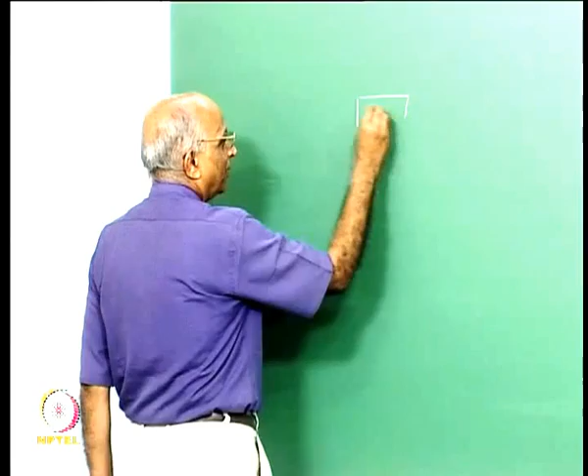When we discussed solid propellant rockets, we told ourselves, well, you have a solid propellant which burns, you have a flame near to the surface, and once a solid propellant rocket begins to burn, it is impossible to extinguish it, right. This is what we told, because you have the grain in a case, and once you ignite the grain, which is the grain over here, there is no way you can quench it, it continues to burn.

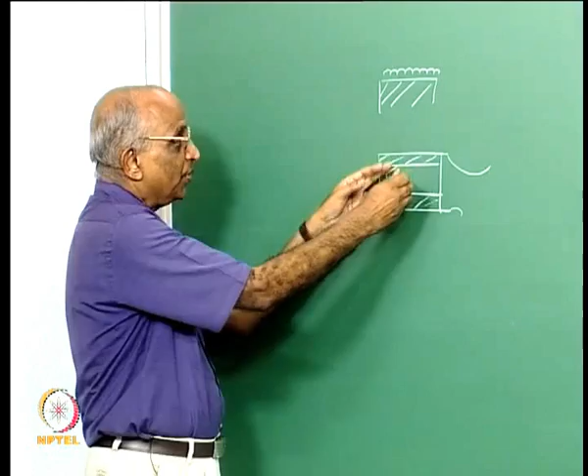Of course, there are some works which are done to see under what conditions you can stop the burning, and by rapid depressurization you can quench it, but these have not reached a stage of application. Therefore, we say a solid propellant rocket, once it gets started, you cannot control it, it burns and burns, that is about it.

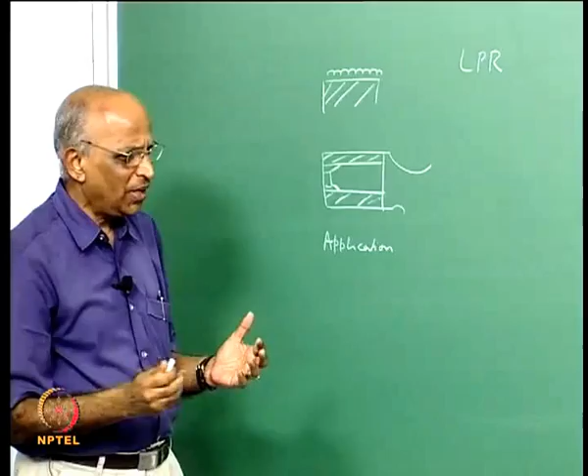Whereas when we talk of a liquid propellant rocket, we have considered different propellants. After all, I inject a propellant into it, I can always control it, and therefore there are certain advantages which a liquid propellant rocket will have.

Let us examine these things, but to get started with liquid propellant rockets, I thought let us go ahead and look at nature. When we considered the theory of rocket propulsion, we talked of a small insect known as the Bombardier Beetle, you will recall. What did we tell ourselves at that time?

This particular insect is smallish, maybe a centimeter to 2 centimeters or so, and it is somewhat heavy, and we find it all the time at all places. It is sort of unwieldy, it cannot fly that rapidly, and therefore it is always attacked by insects, and also it is harmless, it does not bite, we just pick it up on a piece of paper and throw it out, right, whenever it comes.

Some articles have come out on the Bombardier Beetle in the last 10 to 15 years, and one such article came in the Proceedings of the US National Academy of Sciences in 1997, volume 94, pages 1692 to 1697. The beauty of this is we must be familiar with what happens around us.

This Bombardier Beetle is attacked by ants, and what does an ant do? It stings us, right, and why do you feel a sting? It injects some formic acid into our system. Formic acid is a carboxylic acid, and that is why you feel a sting, the same as when a bee stings us, we feel pain because something is injected into us.

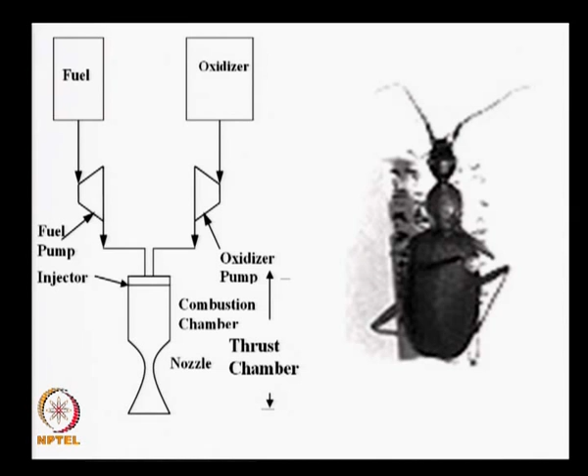A liquid propellant rocket consists just of fuel in a tank and an oxidizer in a tank. You pump the fuel and oxidizer into a chamber at high velocities through an injector, breaking it up into fine droplets and vaporizing it, which all happens in the thrust chamber, and then combustion takes place and you expand through the nozzle. This injector, combustion chamber and nozzle together create thrust and is known as the thrust chamber. So a liquid propellant rocket consisting of all these gadgets is nothing very much different from the Bombardier Beetle in nature. We should learn to look at nature and understand more about it.

I thought at this point we should look at a few more pictures. This is the engine I just showed you, a liquid propellant rocket engine, maybe much taller than this man over here. This is the combustion chamber, this is the pump, this is the nozzle, and this shows the rocket firing.

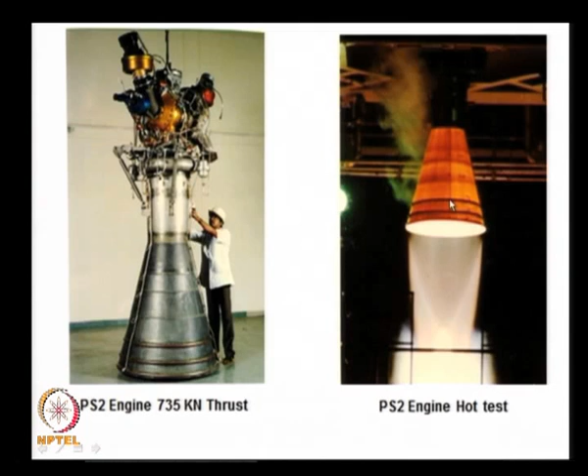I will cover this particular rocket, I was particular to show this. This is known as an RL-10 engine. This was the first cryogenic engine developed, in the United States, in the period of the 1960s.

Here you have the pump mechanism pushing the liquid hydrogen and liquid oxygen into the combustion chamber, which is here, and you see the nozzle is a relatively large portion of the liquid propellant rocket. This gives us some feel for the sizes we are talking of.

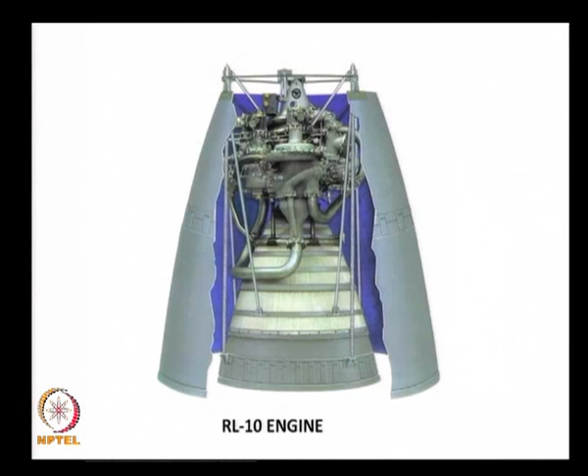What do we infer from these few examples which I have just shown you? In case of a liquid propellant rocket, all what we need is something like a fuel tank, maybe an oxidizer tank, maybe something like a pump.

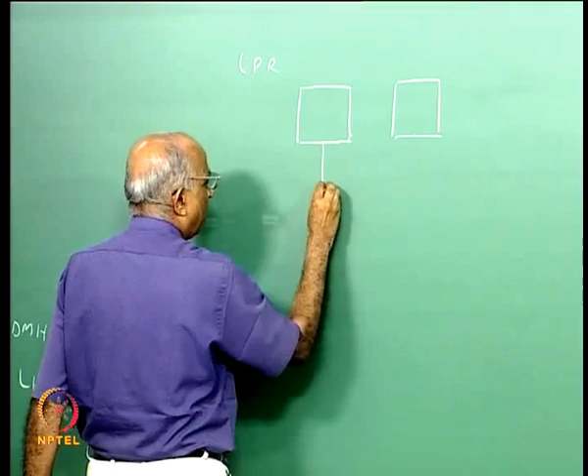From a small value of pressure, I increase the pressure - this shows a high pressure, this shows a low pressure, the magnitude shows the incoming pressure, maybe the incoming pressure should be even smaller, the outgoing pressure should be much larger. I push it into a chamber, and I cannot just push it, I have to break it up into particulates.

That means I need something like an injector which allows the required quantity of propellants to come in, breaks it into droplets, and I have a chamber wherein reaction takes place, and then a huge nozzle wherein I expand the gases. This becomes the liquid propellant rocket.

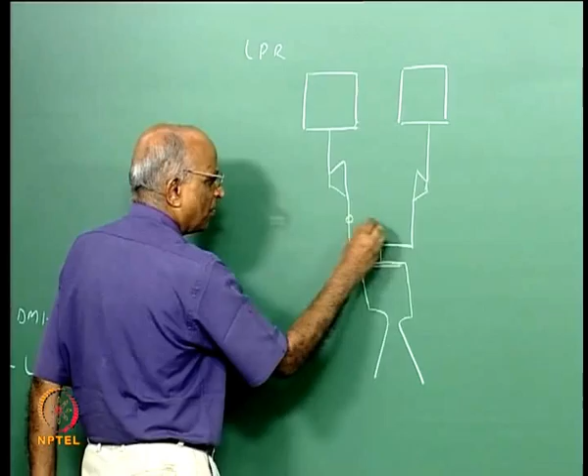Maybe I have to put some valves here to start the combustion and to stop it whenever I want. Let us say the liquid fuel is over here, the oxidizer over here, and here you have the thrust chamber, wherein high pressure gases are formed and thrust begins to build up.

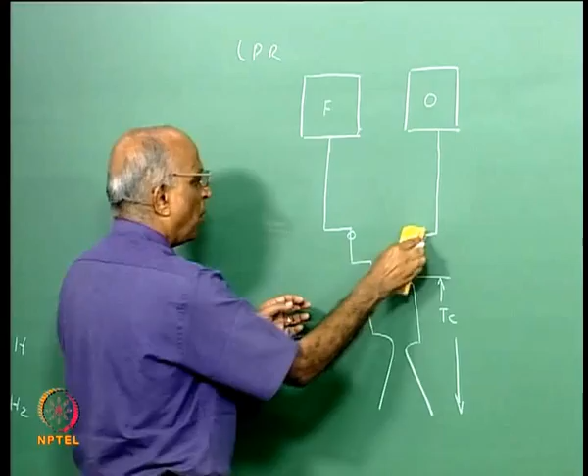Now you will immediately ask me, why do I have to have pumps in the first place? After all I have to supply the fuel - why not remove the pumps and supply it directly, like when we do an experiment using diesel combustion in an IC engine, where I just have an overhead tank, a diesel tank on the wall, connected directly to the IC engine?

Why not directly connect the fuel and oxidizer, and to push it through, maybe have a gas bottle containing high pressure gases, with a pressure regulator over here to reduce the pressure, a reduction mechanism supplying the gases at low pressure. In other words, I put a pressure regulator with a high pressure source of gas.

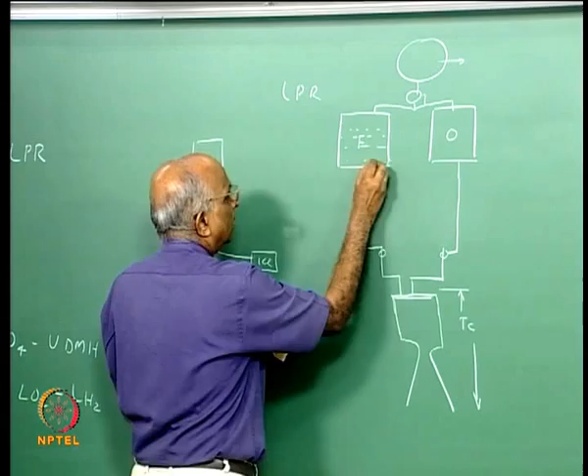Why do I have high pressure? I can have a smaller gas bottle and pressurize the fuel, sending it at high pressure into the chamber. Therefore, I need not always have a pump, but to understand whether pumps are really required, I need to do a little more exercise on this.

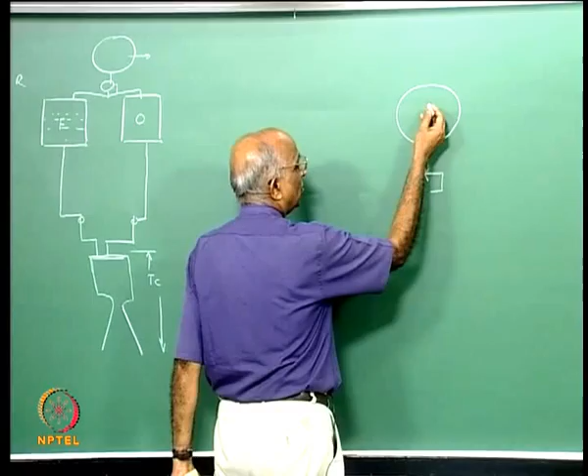Let us see what is required. Let me again replot this. I tell myself I have something like a gas bottle which stores gas at high pressure, and a pressure regulator downstream. What does the pressure regulator do? From high pressure, I can store gas at maybe 30 MPa, 300 to 400 bars, but I do not want such high pressure - I want much lower pressure, maybe 10 MPa or 1 MPa.

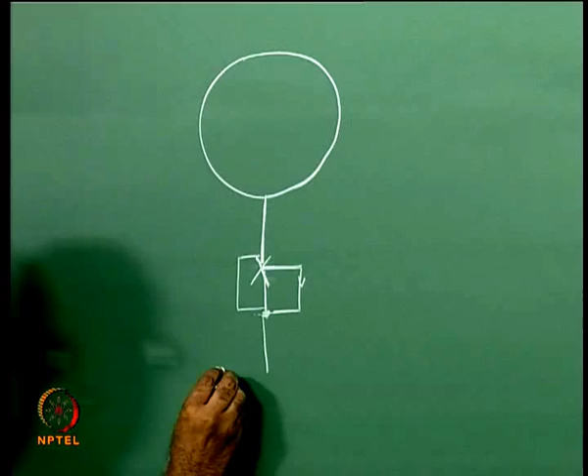I put a pressure regulator which senses and reduces the pressure through a particular opening - it is a feedback control, connected over here as it controls. Then I connect this gas to the fuel tank and the oxidizer tank, which are full of propellants, and bring it into the combustion chamber over here.

What am I talking about? I'm talking about having a high pressure gas bottle. I regulate the pressure to a lower value and push the fuel and oxidizer into the combustion chamber. This becomes something like using a cold gas, a high pressure gas.

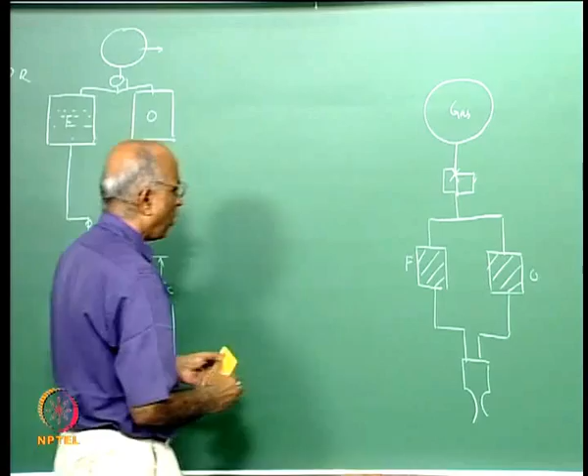I call this a regulated gas pressure fed system. I started with a pump. Let us see under what conditions I would really require a pump, and under what conditions I can use a regulated pressure system instead.

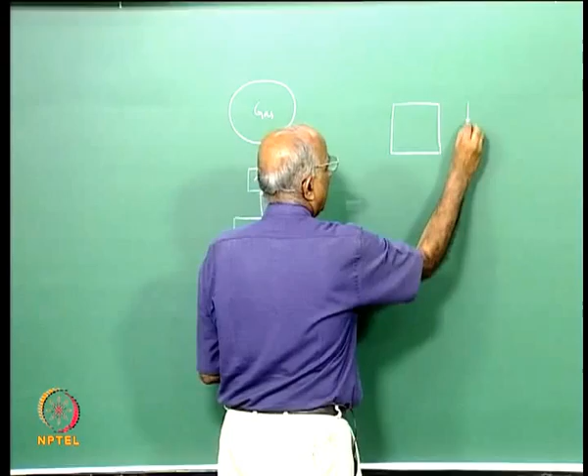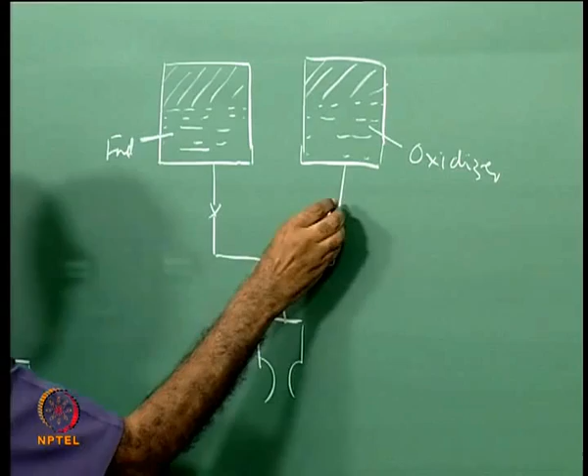I fill gas, maybe at high pressure, and put a valve. When I open this valve, propellant flows immediately. When I want to stop it, I close this valve. The gas is contained in the tank itself and it blows the propellant into the chamber. This is known as a blow down system.

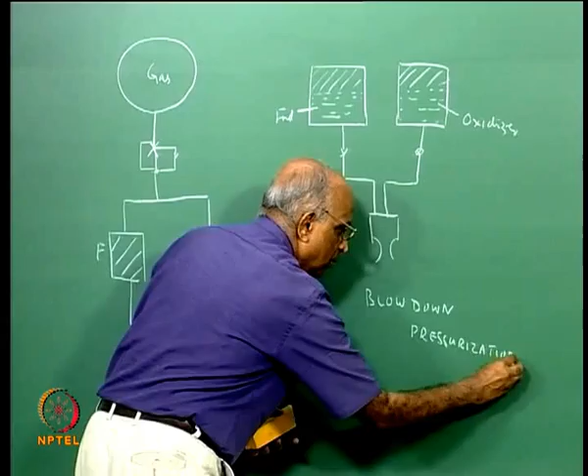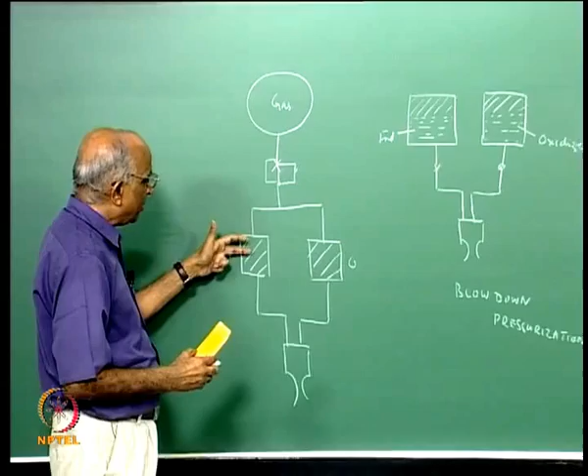So what have I been talking of? In liquid propellant rockets, we need to supply the propellants. We looked at options: a pump may be required, but also a cold gas at high pressure is possible. This gas can be directly filled, and as it blows down, the pressure keeps decreasing and therefore the thrust keeps decreasing. Whereas if I give a regulated gas, I maintain constant pressure and therefore get constant thrust.

Therefore, the high pressure gas fed system could either be in a blow down mode or in a regulated mode. But we can't rule out that the pump is not required.

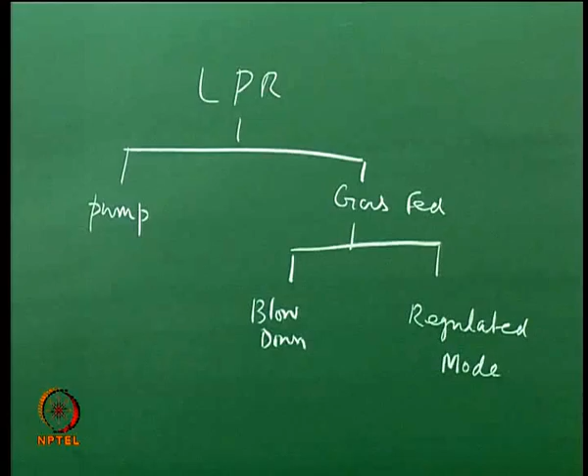For instance, if you have a satellite sitting in space, let us say a spacecraft, I will show you a small model I have of this satellite. Let us say the satellite, like INSAT, is something like a box structure with solar sails. When light falls on the solar sails, it creates pressure. We will study this method of propulsion towards the end of our classes.

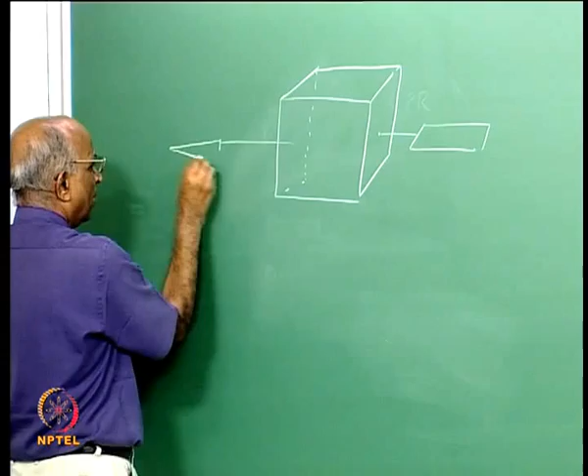You have to balance the pressure from the sunlight falling on this, so you put something like a balance such that it does not get tilted. To control the attitude, we put small rockets on the different faces. How do you supply propellant to this?

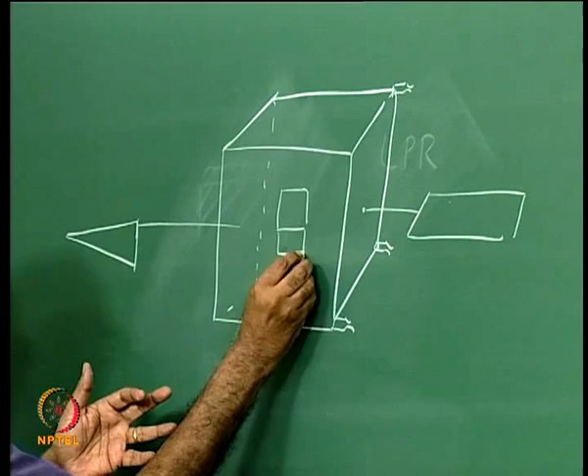Inside the structure, I put a propellant tank, an oxidizer tank. At the bottom of this oxidizer tank, I have a fuel tank, maybe with a common bulkhead, so there's a single connection. This could be fuel, this could be oxidizer. I put gas pressure over here, connected through lines to this rocket, and this rocket, and so on. Whenever I want this rocket, I open the valve and it fires.

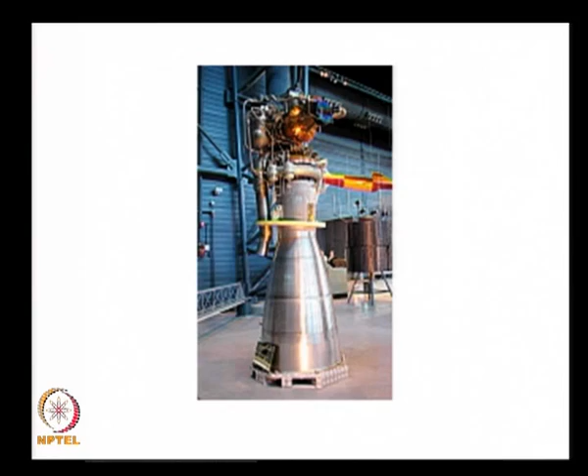But there is a problem.

Whenever I have fuel and oxidizer and a spacecraft is sort of revolving around at a constant velocity, we told ourselves, well, in this frame of reference it has a centrifugal force which is balanced by the gravity. Therefore, there is no weight for this and it creates new problems. Therefore, we have to see under weightlessness how we supply the propellant. Maybe we will take this up after some time.

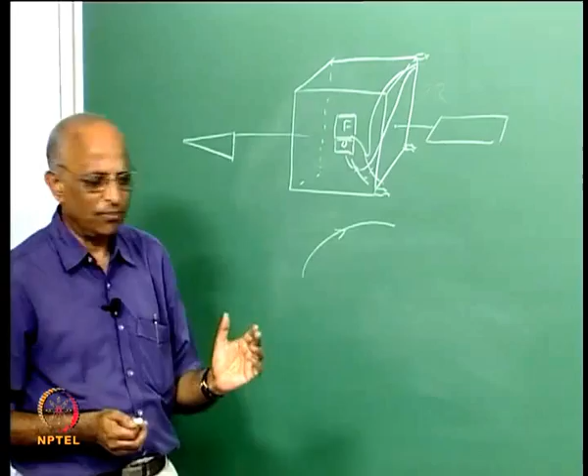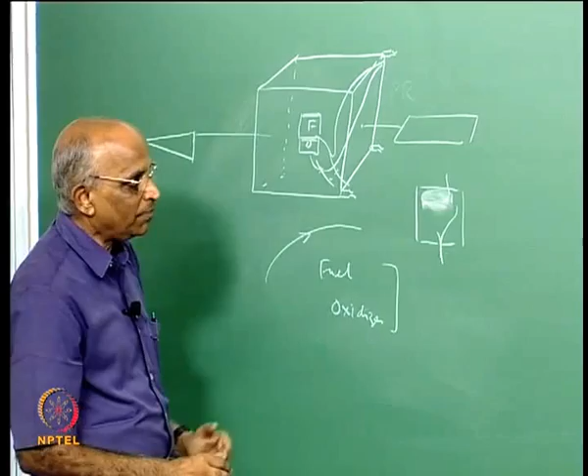This also requires that you supply fuel and oxidizer when they are in a state of weightlessness. That means if I put a propellant in a tank, the propellant may sit on top, it may not really come to the bottom, and when I pressurize it, the gas may come out and the liquid may not come out. So supplying propellants in a state of weightlessness is again going to be a problem. Maybe we will take a look at it.

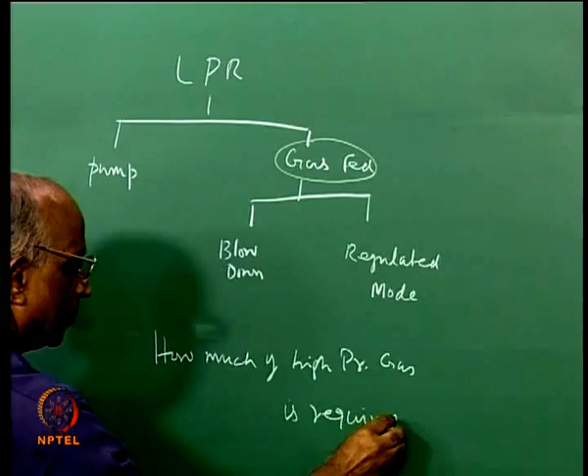But right now let us take a look at what constitutes a gas fed system, which could either be blow down mode or regulated mode, and then let us come back to the pump. Let us see if in between these two anything else is also there. To be able to do this, let us first try to find out how much high pressure gas is required. First thing, we have to supply the propellants. Once I give the thrust, I know what must be the mass flow rate of propellants. How do I calculate it? Let us refresh ourselves again.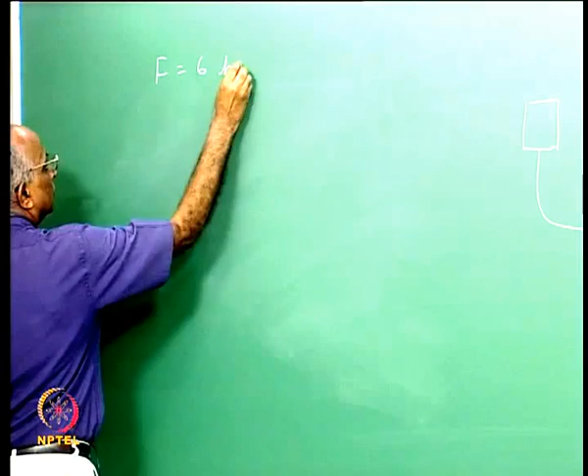Suppose the thrust of the rocket, as an example, is 6 kilonewton. Let us say the specific impulse of the rocket is equal to 3000 Newton second per kg. Then the mass flow rate of total propellants, fuel and oxidizer, is equal to 6000 Newton divided by 3000, which is 2 kg per second. To supply this 2 kg per second, maybe the rocket has to fire for a small time, let us say 200 seconds.

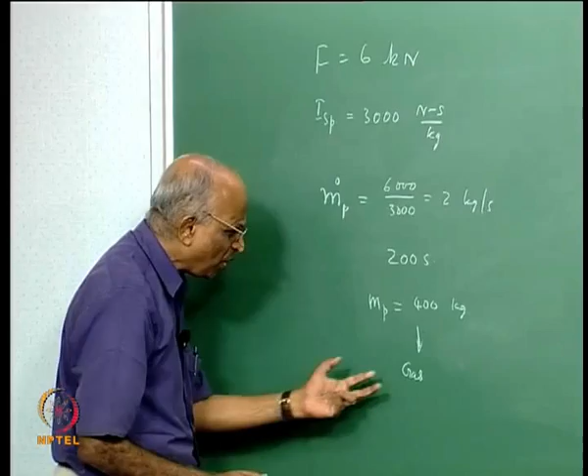Then I need to supply a total mass of something like 400 kg during the 200 seconds. We talk of 6 kilonewton, 6000 Newton, this is 3000 Newton second per kg, 2 kg per second. This is the total mass of propellant which has to be exhausted. I want to know how much mass of gas is required. Do I require 1 kg, do I require 100 kg? Because if the gas requirement is large, the rocket cannot take off. Let us try to estimate it. And how do we estimate it?

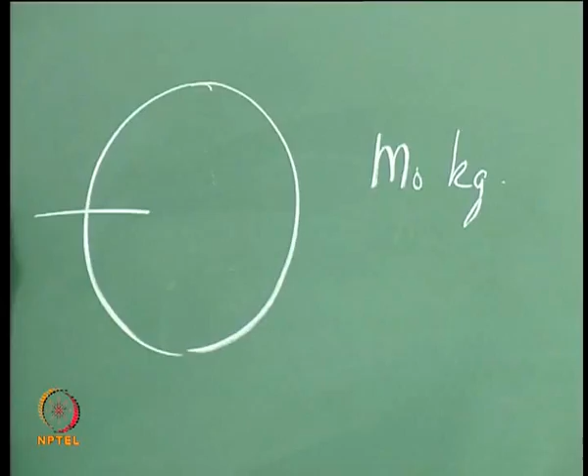We again follow the same figure, but now let us simplify it. I have gas pressure, and we also told ourselves that gas can be stored at fairly high pressures. Let us plot it out. I have a gas bottle containing, let us say, M0 kilograms of air or whatever gas is required. I must also find out which gas will do my job well. Let us say it is at a high pressure P0 and at the room temperature T0, because at this point I do not want to say I need a hot gas or a cold gas. Maybe when I derive the expression, it will be clear what type of gas is required and what must be the temperature of the gas.

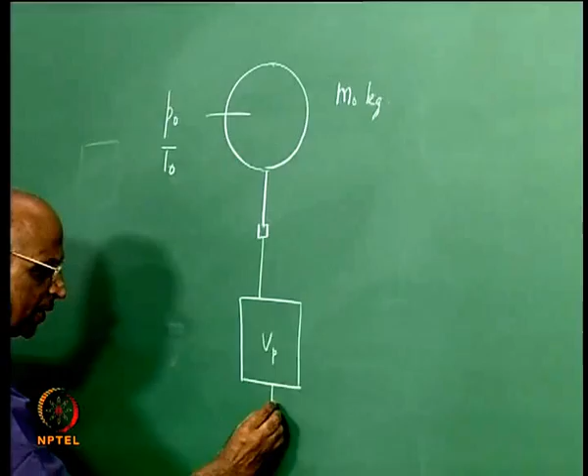From this high pressure source, I put a pressure regulator here and reduce the pressure from the value of P0, and it must communicate with the two tanks I put together. Let us say the total volume of propellant is Vp, and this is what must be supplied to the thrust chamber over here. Let us say the pressure at which I would like to supply it, at this surface, is Pp, in Newton per meter square or Pascal, and I reduce the pressure from P0 to Pp in this regulator.

I reduce the pressure from P0 to the value Pp. Now my point is, how do I find out the value of M0 kg? I think it is a straightforward thermodynamic problem, but before doing this problem, it is also required for us to put some other things down. Let us do a general problem.

Let us say at this point in time, when I start the work, the quantity of propellant liquid which is available is Vp. When I finish my exercise, I use some gas for pressurization. Therefore, at the end of operation, let us say Mr kg is left, the temperature here is Tr, the pressure is Pr, and I have the same tank over here, all the propellants are expelled, it is now gas over here.

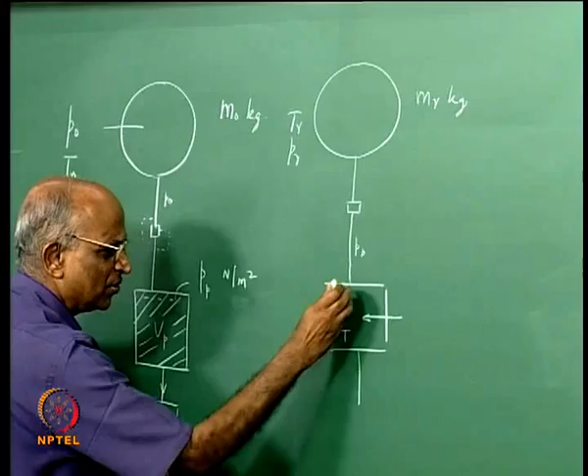Since I have reduced the pressure to Pp through the regulator, when the propellant has just got out of it, it will be filled with gas at a pressure Pp, and the temperature, whether it is slow or fast depletion, reaches the temperature of the propellant, Tp. This is my initial condition, let me make the figure complete.

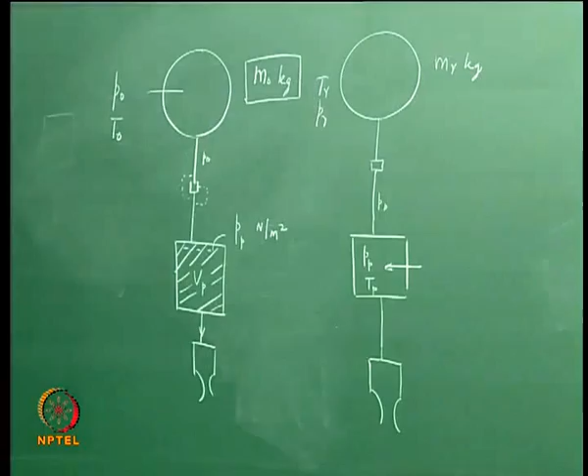What is it I am telling? I have pushed out a volume of propellant Vp, and the gas has expanded and occupied this volume in addition to this volume, and this is my final condition. I want to write an equation and determine the value of m0 kg required. Maybe we have done such problems in our thermodynamic subjects earlier.

What is happening? Let us make an assumption that the tanks are fairly insulated, the gas bottle is insulated, there is no heat transfer taking place, and therefore I ask myself, what is the work done by the gas in pushing out a volume Vp of the propellants?

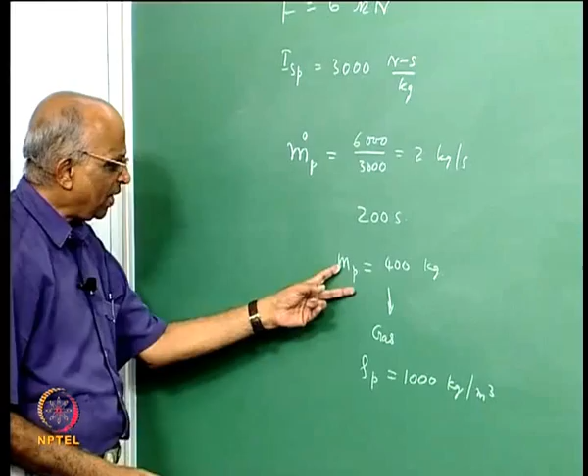Let us calculate Vp for this particular problem. If I take the density of the propellant to be the same as water, 1000 kg per meter cube, 1 gram per cc, the volume Vp is 400 divided by 1000 meter cube, which is equal to 0.4 meter cube. For this rocket I have to get rid of 0.4 meter cube at a given value of pressure. Before I complete that problem, let us generate an expression.

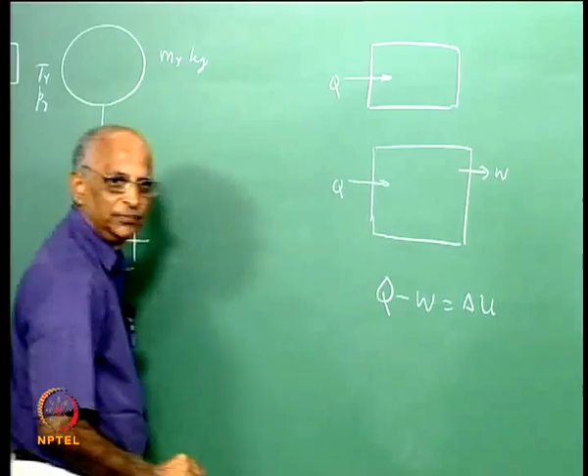Supposing I have a system like this. This is my initial state of the gas, and the final state is this, in which the gas has moved over here. The system does some work at the boundaries, so I can write Q minus W is equal to the change in internal energy for a system. I take an adiabatic system, Q is 0, so I need to find the value of W and the change in internal energy. Let us write the expressions for these two.

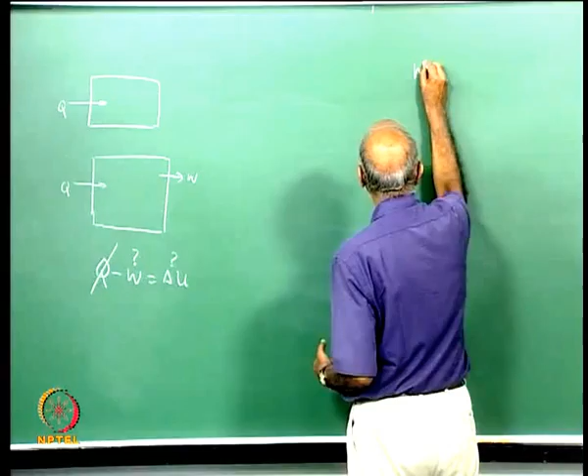The work done by the gas is in expelling the liquids. I have a constant pressure applied, the displacement is Vp, so the work done is equal to Pp into the volume of the liquid. What is the change in internal energy, final minus initial? Finally, I am left with Mr of the gas over here. We know du by dT is equal to Cv, where U is the specific internal energy,

and dH by dT is equal to Cp. Since U is equal to Cv T, the final internal energy is the final gas Mr into Cv into Tr, at a reduced pressure and temperature because it has expanded, plus the gas Mp into Cv into Tp. I say the volume of the plumb lines is much smaller, therefore I neglect it. And what is the value of the initial internal energy? Minus, yes, you could tell me.

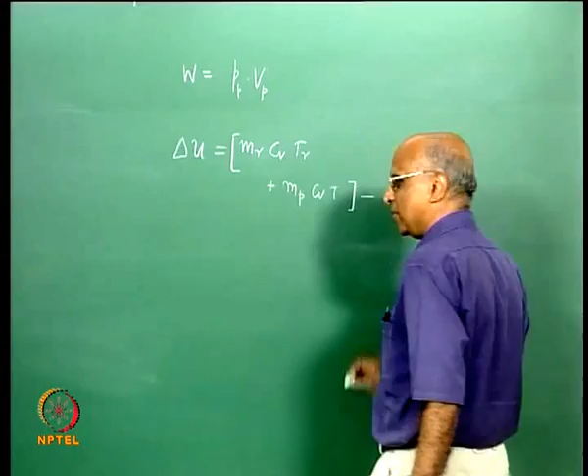What will be the initial value? Yes, m0 into Cv into initial temperature. I need to solve this equation and find out this after knowing that minus W is equal to delta U. Let us find that value. Maybe I use this part of the board.

What I have: Mr into Cv into Tr plus Mp into Cv into Tp, temperature of the final propellants should have been Tp over here, minus M0 Cv into T0 is equal to minus W minus Pp into Vp over here. Is it all right? Q minus W is equal to the change in internal energy.

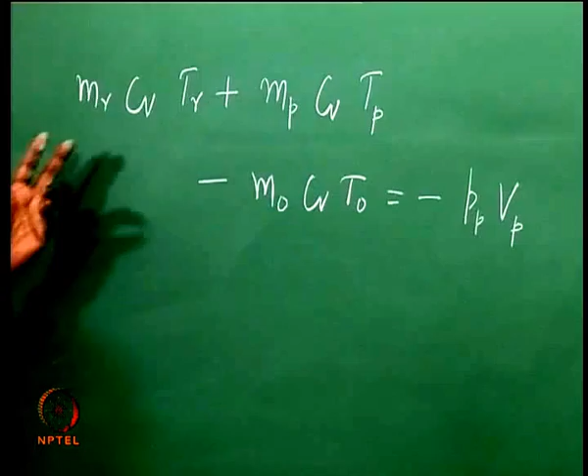I want to solve this. To be able to solve this, let us see what Cv is. We know Cp minus Cv is equal to R, and therefore Cv into gamma minus 1 is equal to R, or rather we have Cv is equal to specific gas constant divided by gamma minus 1, where R is the specific gas constant, has units of joule per kilogram Kelvin. And Cv therefore has units of again joule per kilogram Kelvin.

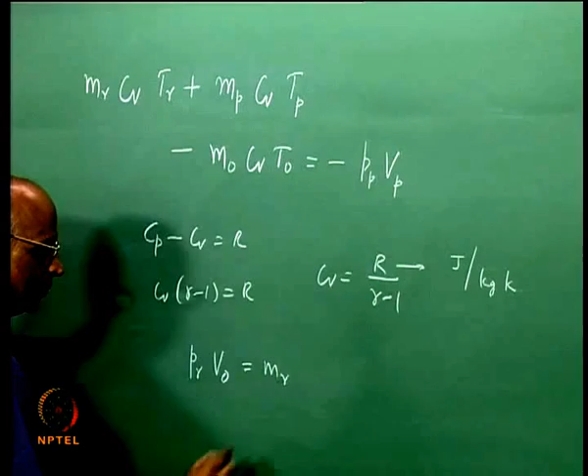Now, what is the value of Mr from the gas equation? We have Pr into V0, that is the volume of the tank, is equal to Mr into R into Tr, or rather I can write the value of the final mass after expansion has taken place in the tank, and the mass of gas in the tank is equal to Pr into V0 divided by RTr.

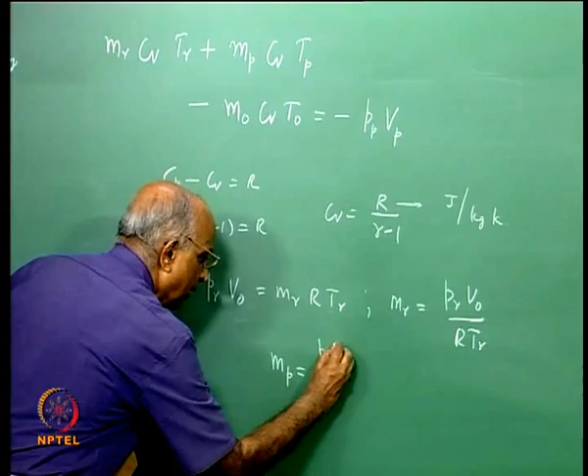Is it all right? Similarly, I can write an expression for Mp, and what will Mp come out to be? Mp should be equal to Pp into Vp divided by R into Tp over here. I need to find the value of M0, therefore let us not touch this. Therefore, let us substitute these two values of Mr, Mp and the value of Cv in this expression and try to get the value of M0 coming out.

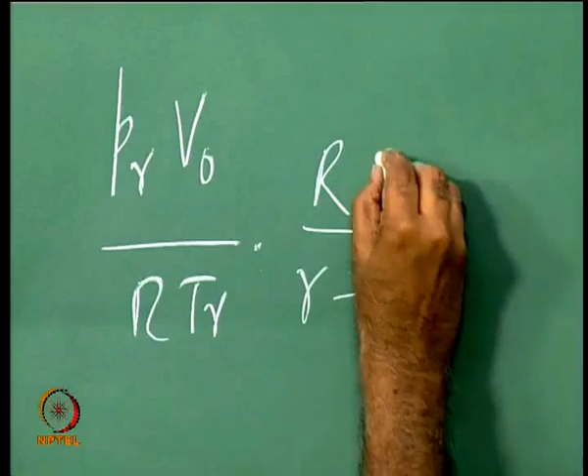Let us say Mr is equal to Pr into V0 divided by RTr, and Cv was equal to R divided by gamma minus 1, and into Tr, plus similarly I get Pp Vp by RTp into R, again I get the value of Tp divided by gamma minus 1, minus I get the value of M0 into R divided by gamma minus 1 into the value of T0 over here, this is equal to minus Pp into Vp over here.

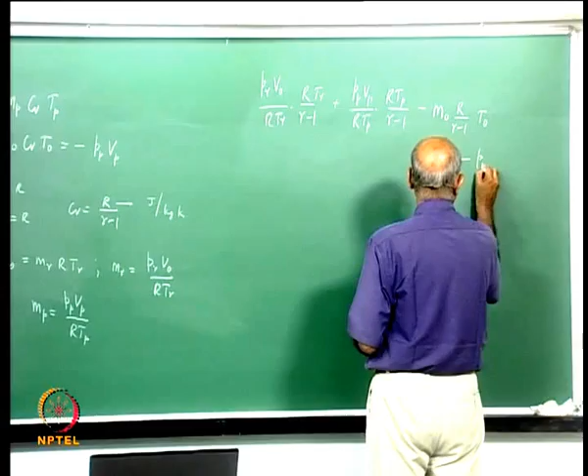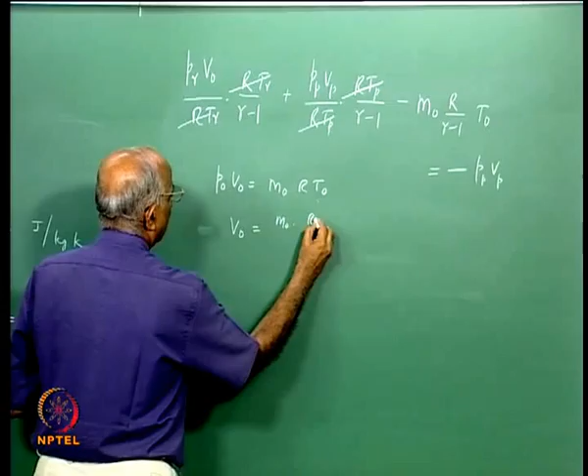Is it all right? Now, I find that RTr cancels, RTp cancels, and now if I were to simplify, I do not know the value of volume because volume is related to mass. I can write P0 V0, that is the initial condition of gas before starting, is equal to M0 RT0, or rather I can write the value of V0 as equal to M0 into RT0 by P0.

I substitute this expression, volume is equal to mass into RT divided by P, over here, take gamma minus 1 on the right hand side, because all the 3 have gamma minus 1, and therefore I get m0 into RT0 into Pr by P0, plus I have Pp into Vp, minus m0 into RT0, is equal to minus Pp, I am sorry, because I am going to remove gamma minus 1 here, minus Pp Vp into gamma minus 1.

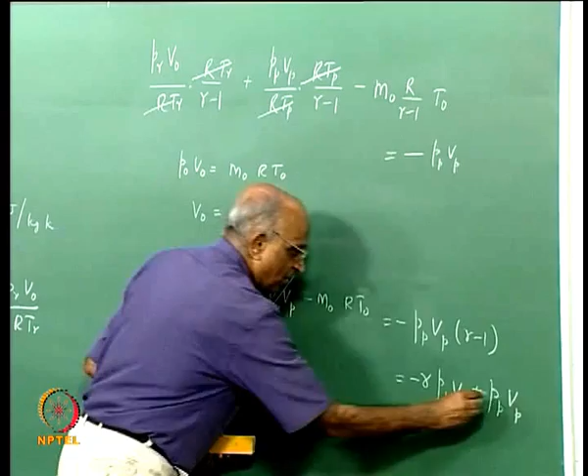This right hand side now reduces to minus gamma Pp Vp plus Pp Vp, because minus and minus becomes plus. Therefore, immediately this and this gets struck off, and now we are able to get an expression for m0. Let us put it over here. Let us collect the similar terms. I get RT0, which will come at the denominator. I have in the numerator the value gamma on the right hand side. Therefore, gamma Pp Vp divided by 1 minus the value of Pr by P0.

Please check this. How did we come to this? We have m0 RT0 into Pr by P0 minus 1 is equal to minus gamma Pp Vp. Therefore, I change the sign on both sides. I get gamma Pp Vp divided by RT0, which comes in the denominator, divided by 1 minus Pr by P0. Therefore, this becomes my mass of the gas which is required.

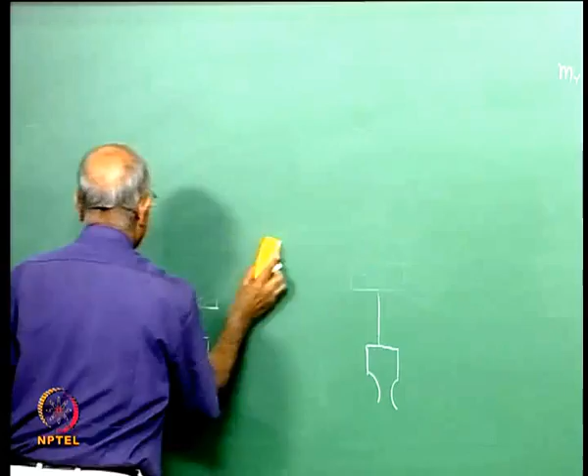Now, I want to examine how much is this gas, what is this expression. Whenever we derive an expression, we must take a look and see under what conditions this holds good. Let's do that. I do not need this anymore. I say, had the process been isothermal, what would be the gas I require? M0 will be equal to Pp Vp by RT0, because it is isothermal.

Therefore, what happens when gas is expanding, and that also irreversibly? Under isothermal expansion, I would just have Pp Vp by RT0, and due to the expansion process, I have an amplification taking place, 1 minus Pr by P0, and this is because of the expansion process which is taking place. I am writing the same thing, Pp Vp by RT0, because M is equal to PV by RT0, isothermal, and then this is the multiplication factor.

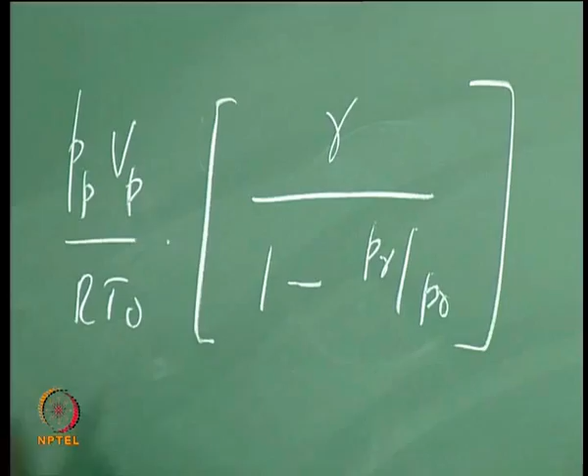Now, I want to find out, maybe for this engine which we said is 6 kilonewton, the mass of the gas which is required. Let us do one example, and then we can extend it for different pressures and different thrust. Let us say in this case the volume is equal to 0.4 meter cube, and now how much gas do I require? Will this expression also tell me what is the type of gas which I require? Do I require a light gas or a heavy gas? What does this expression tell me? Can we all infer something from this?

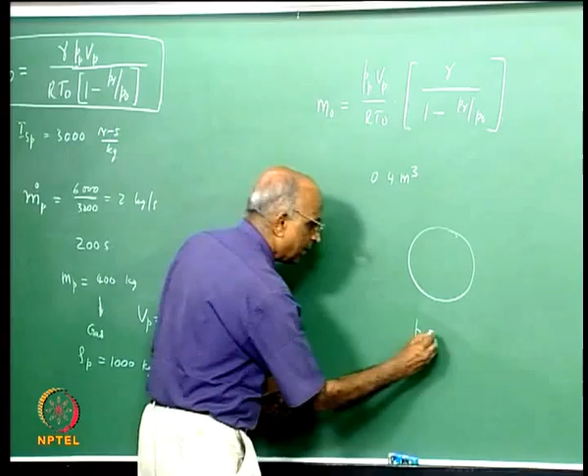Should I pressurize the initial volume with a high molecular mass gas, low molecular mass gas, or at a high temperature, or under what conditions? All what I can tell you is the value of P0 is limited, because I need a gas bottle which can hold certain pressure, and that pressure cannot be greater than around 300 to 400 bar, because beyond that to make something hold such high pressure gas is difficult. Therefore, normally the P0 is around 30 to 40 MPa. This is bar over here, right. Now, all that I know is P0. How can I choose the other parameters like gamma, R and all that? Does it tell me what is the type of gas which is required?

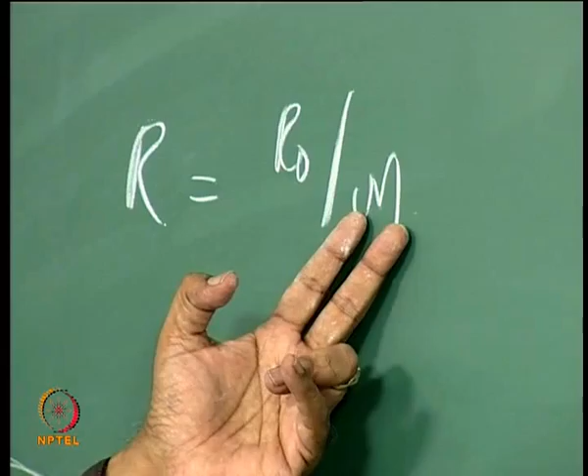We do one more exercise. Let us say R is equal to universal gas constant divided by the molecular mass, 8.314 by the molecular mass. If the molecular mass of the gas is smaller, I get a very large value of R. If I get a large value of R, I can have a smaller mass of the gas. Therefore, this immediately tells me the lighter the gas the better. Hydrogen is the lightest, whereas helium has a molecular mass of 4 gram per mole. Therefore, invariably I would like to choose helium, which is a light gas, for my purpose. See, the expression is able to tell us what we are looking for.

This is one. Second is, well, helium has a large value of gamma, 1.67 compared to air of 1.4, whereas R could be something like 4 and 28, 7 times. Therefore, this is not that important, this is more important, and therefore I choose a light gas for pressurization. But this expression also tells me a higher temperature is suited, because higher temperature means I have a smaller mass of the gas. Therefore, rather than a cold gas for pressurization, why not use a hot gas? Why not have some reactions taking place in the combustion chamber and do this? And therefore, this is also an option.

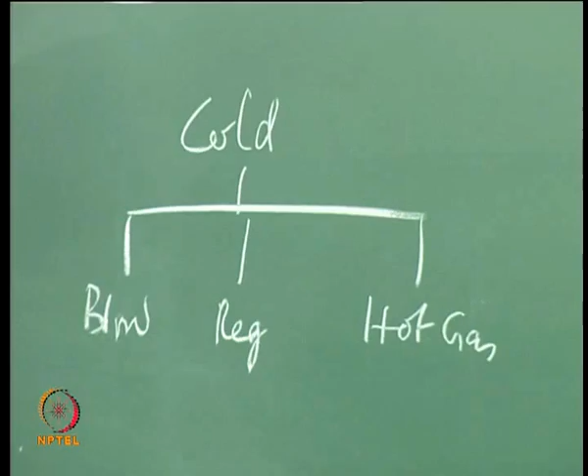Therefore, in addition to saying for cold gas I could have blow down mode or regulated mode, it is also possible for me to have hot gas, and hot gas is more efficient. But in practice it has been difficult. Several countries have tried it, but it has not yet found an application. But I think we should keep this in mind. I think in future this will be a strong contender for a gas pressurized system.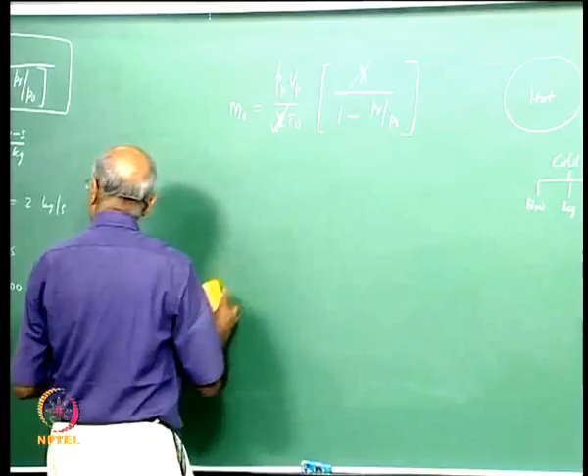Having said that, let us do a small numerical problem to see what is the amount of gas. We should have some feel whether I need 1 kilogram or a few grams. Let us say for this rocket, which is requiring a Vp of 0.4 meter cube, the chamber pressure, a small chamber pressure, is 1 megapascal. If the chamber pressure is 1 megapascal, I have to force propellant into it, let us say Pp is equal to 1.2 MPa.

Therefore, I say yes, the final pressure, the lowest PR, is equal to the supply pressure over here. The volume is known, R for the gas helium is equal to 8.314 divided by 0.004, so much joules per kilogram Kelvin. This is known, and I can calculate the value of mass. And this value of mass for this particular thrust, when the supply pressure is 1.2 MPa, works out to be something like 1.34 kg.

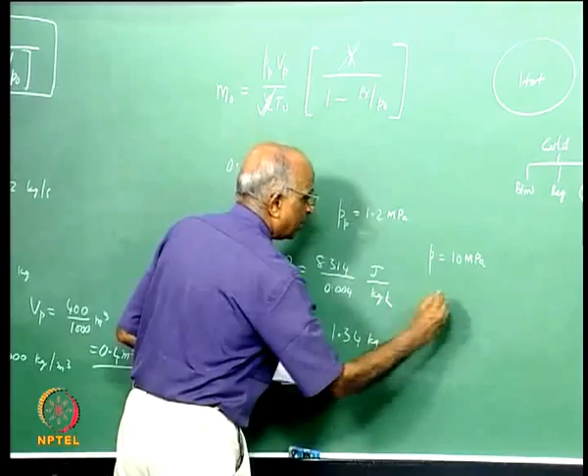Now, I want to slightly change it. I have the same rocket which is developing 6 kilonewton, but the chamber pressure, instead of being 10 bar or 1 megapascal, is now changed to 10 MPa, and the supply pressure therefore becomes, let us say, 12 MPa, and therefore the quantity of gas becomes directly 10 times, that is something like 13.4 kg, right.

Now, if I talk in terms of a thrust which is much larger, maybe 600 kilonewton, the quantity of gas will be very much larger. Maybe you should try this as an example, but let me summarize it through slides. And what I do in the next series of slides is, well, this is what we said as a regulated pressure system. This is something like a blow down system, and we wanted to find the gas.

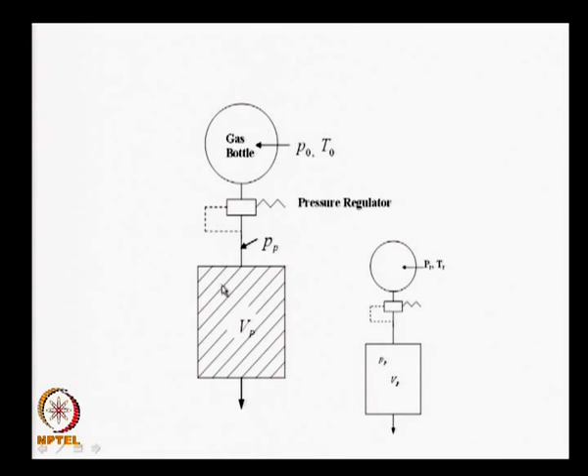Well, we had the gas bottle, we had the regulator, oxidizer and fuel to supply over here, and we simplified it. This is the initial condition, this is the final condition, and then we said m0, mass of the gas required, is equal to Pp Vp by RT0 gamma by 1 minus PR by P0, and then we found out that hot gas pressurization is an option, and now we calculate the value.

When I have a low pressure engine of thrust of 6 kilonewton, the chamber pressure is 1 MPa, the supply pressure is 1.2, the mass of gas required is 1.34 kg. When the same 6 kilonewton is operated at a high pressure of 10 MPa, the supply pressure is 12 MPa, the mass of gas becomes, instead of 13.4, maybe this factor I had removed, therefore it is not 13.4, but it is 21.34. Maybe you all should check it at home.

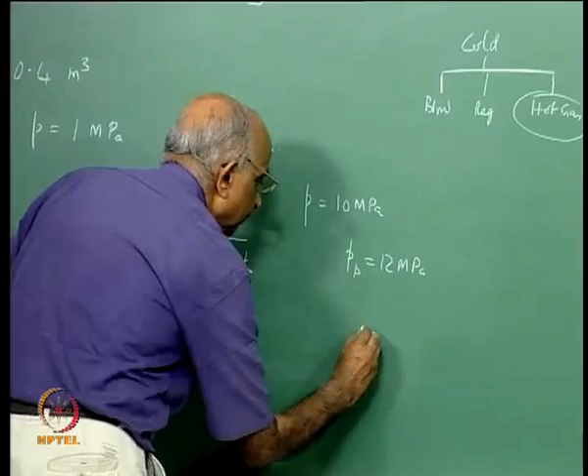You see, when the chamber pressure increases by 10, the quantity of gas is increased by almost 20 times, whereas if I have a high thrust engine of 600 kilonewton, at the same pressure value the quantity of gas required is something like 2000 kg, and therefore it is not humanly possible to have such amounts of gas carried in a rocket, and that is where it becomes necessary for us to have something like a pump which can supply the propellants to it, and that is why the necessity of a pump.

Now if you were to go back and compare the different systems we had, we talked of a blow down, a stored gas, a hot gas. We find when the thrust is small and the burning time is small, I can manage to have a blow down system like what was used in our INSAT spacecraft, because I need very small thrust, I operate at low chamber pressure. When I want to operate at slightly larger time, slightly larger thrust, maybe a regulated gas system is required, or still better a hot gas system, but beyond some thrust and some burning time, I need to operate in this region, which can only be done using a turbo pump or a pump system.

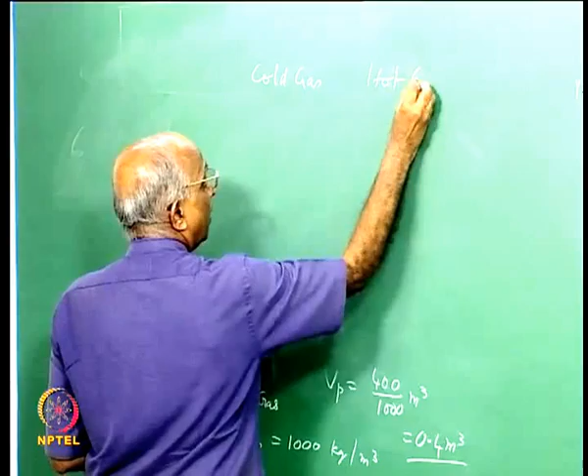Therefore, what is it we have been telling ourselves so far? We said the feed system could consist of different possibilities: we could have cold gas pressurization, that means a gas bottle, or something like a hot gas. The cold gas could be either in a blow down mode or in a regulated mode, but if the rocket fires for a longer time and if the thrust or the chamber pressure is large, I essentially need a pump to take the fuel from the tank into the chamber, and this is what we must remember.

Therefore, maybe I need a pump system. Now let us go back and calculate what is the power of the pump which we require in this case. Let us just do that small exercise using the same numbers we had.

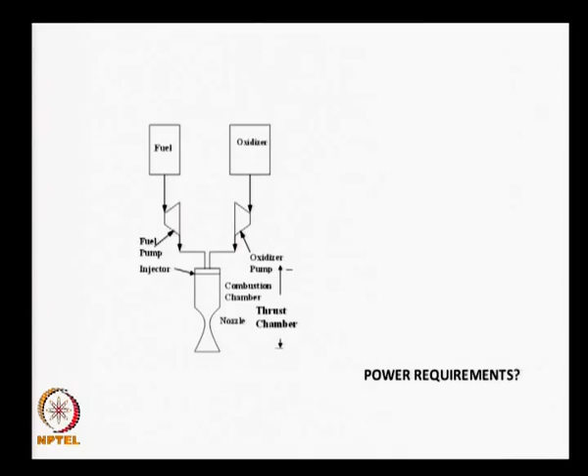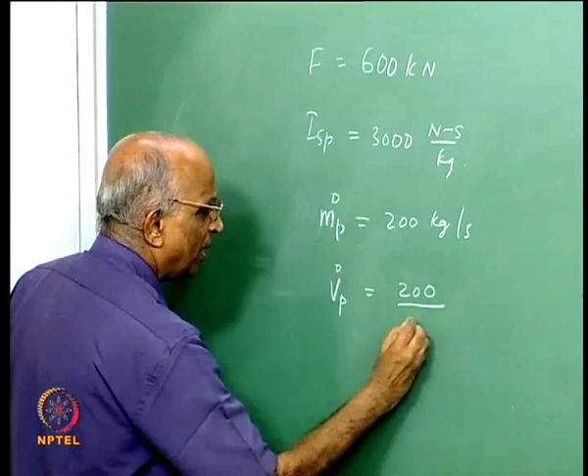Let us take this example. The thrust of the engine is equal to, let us say, 600 kilonewton. This is how that engine was, I showed you UDMH-N2O4 has a thrust of around 600 kilonewton, and the specific impulse is equal to 3000 Newton second per kilogram. Therefore, my mass flow rate of propellant is equal to something like 200 kg per second. Keep these numbers, let us have some familiarity, because we must be able to think in terms of numbers. 600,000 divided by 3000 is equal to 200, therefore I have 200 kg per second. If I have to supply this, taking the density same as water, the rate at which the volume has to go is 200 divided by 1000 meter cube per second, which is 0.2 meter cube per second.

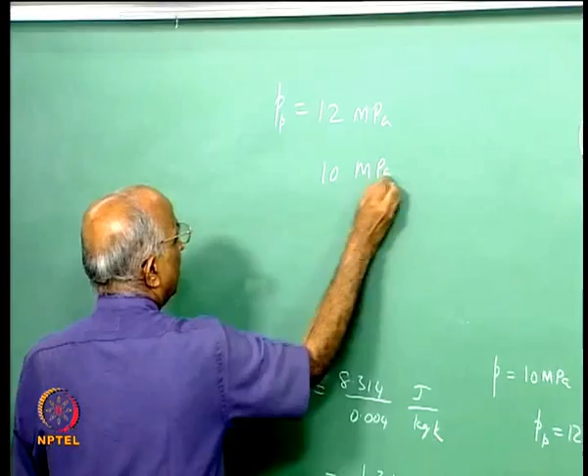What is the power required for a pump to supply 0.2 meter cube per second at a given pressure? Let us take the same value of pressure, say 12 megapascal, because the chamber pressure I am talking in terms of 100 bar, the chamber pressure is 10 MPa. What is the work to be done by the pump which is to supply flow rate of 0.2 meter cube per second at a pressure of 12 MPa?

Rate of work done is equal to Pp into Vp, and this comes out to be, let us calculate, 12 into 10 to the power 6 into Vp which is 0.2 meter cube, that is equal to 2.4 megajoule per second, which is equal to so much megawatts.

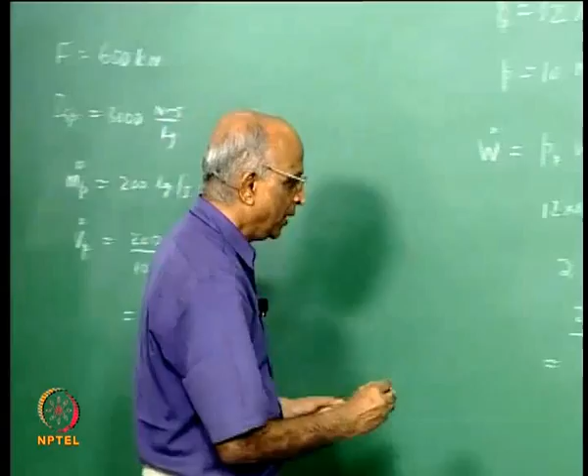Can we have some feel for this number? The power produced in the Ennore plant, which supplies entire electricity to Chennai, is something like 450 megawatt. If we take a super thermal power plant like Ramagundam, it has something like 2400 or 2600 megawatt. That means the power we are talking about is enormous.

I cannot have a battery or an electrical power source doing it, and therefore what we normally do is we need something like a gas generator which can supply work to a turbine, and using the turbine I drive the pump, and therefore it becomes a pump and a turbine, known as a turbo pump.

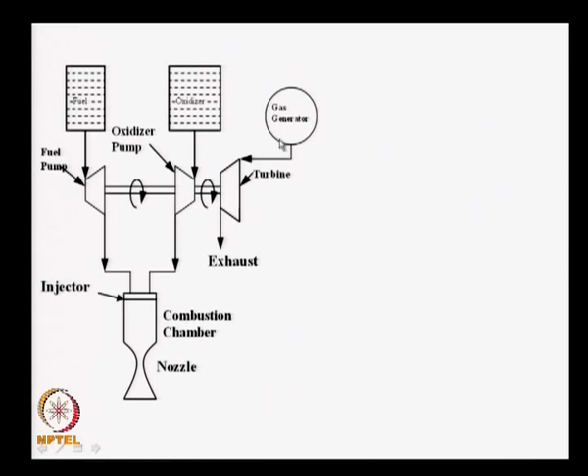I require another gas source, but having a dedicated gas source is a problem, so what we do is take the fuel, take the oxidizer, pump it, remove some fuel from the fuel line, remove some oxidizer from the line, burn these gases separately, generate hot gases, supply these hot gases into the turbine, generate work which drives the fuel pump and oxidizer pump, and supplies it to the chamber, and the exhaust from the turbine is left out. This is an auxiliary nozzle, meaning part of the fuel is used in generating high temperature gases, not very high because a turbine cannot take very high temperatures, so you leave it to the ambient, and this becomes what is known as a gas generator cycle.

That means I have a pump which is supplied gas through a gas generator, and such a feed system is known as a gas generator cycle for feeding propellants.

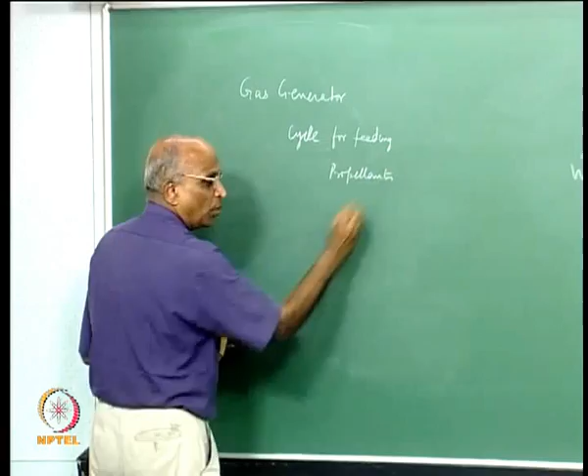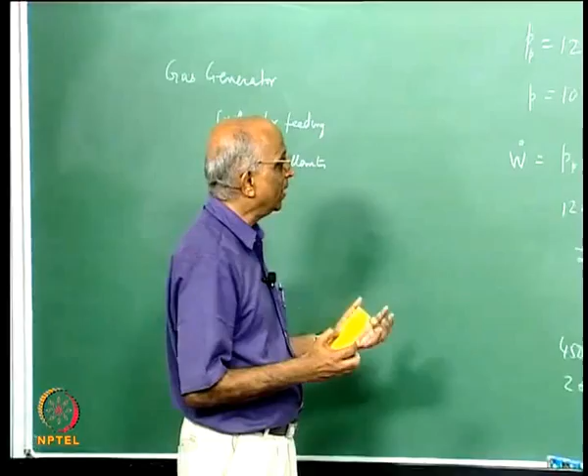I think I will stop here, but all what we did in today's class is we looked at that bottle and said a liquid propellant rocket is quite similar to that. We talked in terms of cold gas pressurization consisting of blow down, regulated, maybe hot gas pressurization, and then found that when my duration of the rocket is large and my thrust is large or my chamber pressure is large, it is just not humanly possible to carry such huge masses of gas required. I need a pump, but then we found a pump demands huge amount of energy. I wanted a gas generator, and this is what we call a gas generator cycle. In the next class, we will advance ourselves, see what other cycles we can use, and calculate the performance of a rocket corresponding to those cycles.

And then we will go to the components of a rocket. Well, thank you then, I think that is about it.